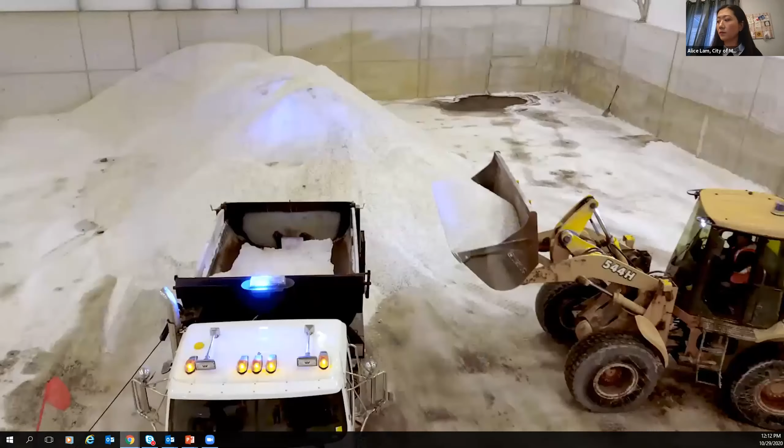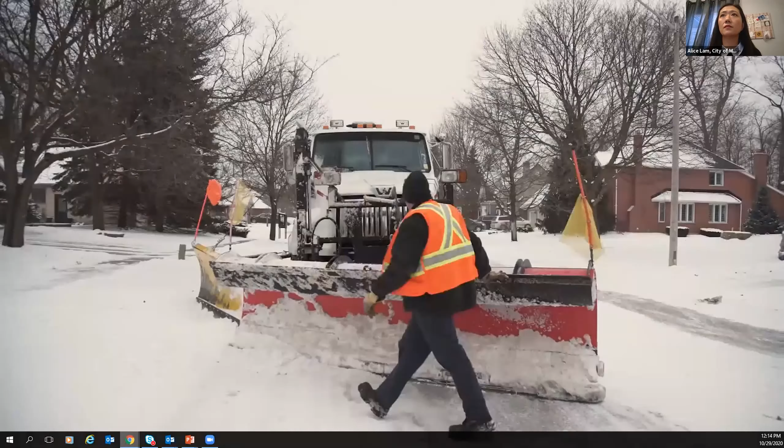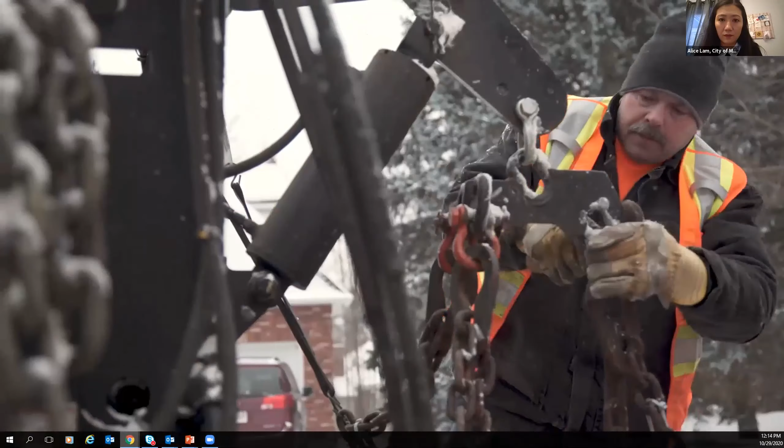I am a skilled laborer with a DZ license for the city. In the wintertime we do winter maintenance. One of the good things about this job is plowing the roads and keeping the community safe. If there's snow on the roads or snow coming, we get the trucks ready, put the plows on, do pre-trip inspections, load the trucks with salt. Usually a full plow starts at 1 o'clock in the morning. The city is divided into different zones. Our main concern is to do all the major arteries and bus routes first, which gives us time to do the subdivisions. You try to be sympathetic with people shoveling their driveway, and they see the plow truck coming and wave their fists or throw shovels. It's unfortunate, but you've got to put the snow somewhere. People do park on the side of the road, and it's inevitable that a plow truck trying to come down your street, or what if it's a fire truck, can't get past and has to back all the way down. If they weren't parked one across from the other, we could get by. If you have to start work at 7 in the morning and know the roads will be snow covered or bad, leave 15 minutes early and have good snow tires on your vehicle. Everybody wants to go home at the end of the day. We don't drive these vehicles that fast. You have snow coming off the wing, so stay back a little bit and try not to pass us, more for your own safety. Be patient with us so we can do our jobs safely. I love this job, it's rewarding and feels good to be part of a community. Our goal as snowplow operators is to make it safe for you and your family to get from point A to point B, just as I want my family to get from point A to point B. I know at the end of the day, at 11 o'clock at night, I'm shoveling like everyone else. We live in Canada. It's a great country.

Okay, so hopefully that gives you a perspective about our job in maintaining and providing winter maintenance through operations. If you want to find that YouTube video again, you can Google it - it's from the City of Kitchener and Waterloo, and I find it's a good segue for opening the forum.

So as the video said, in winter operation our mandate is to provide safe roads for everyone, and we want to make sure everyone gets home or to their destination safely. So how do we do that?

The first part of the puzzle is weather monitoring. Weather monitoring isn't just looking at what's happening today - it's kind of a science. We look at what happened in the past, what's going to happen today, and what's going to happen in the short term within a week and also two weeks out, because depending on the weather, it could trigger a different type of operation.

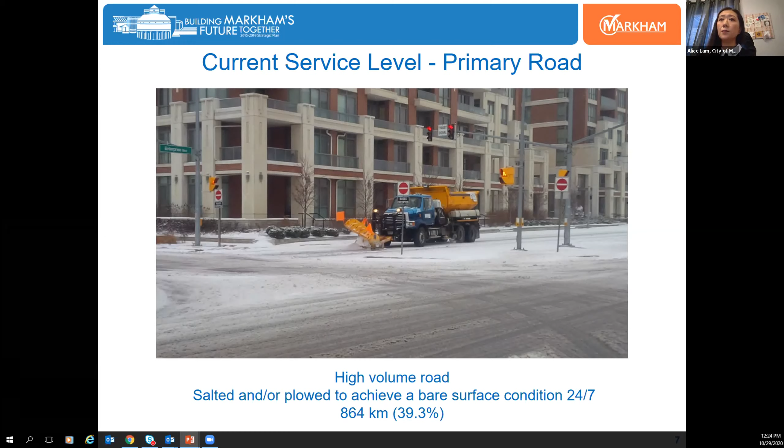So you can see this type of road is very important to us, 24 hours, 7 days a week surface. The reason is these provide the arterial for emergency services and connect to a lot of the regional roads or provincial highways. In City of Markham, primary roads make up approximately 39% of our network.

Secondary is our second class, which connects our local roads to our primary roads, and it's a small percentage, 7.5% of our entire road network. These roads are expected to achieve center bare surface between 7 to 6 p.m. Center bare means the crown of the road - let's say it's a 4-lane road, we try to clear as much of the center as possible. But first we clear the primary roads; once we clear the primary, we can get into the secondary.

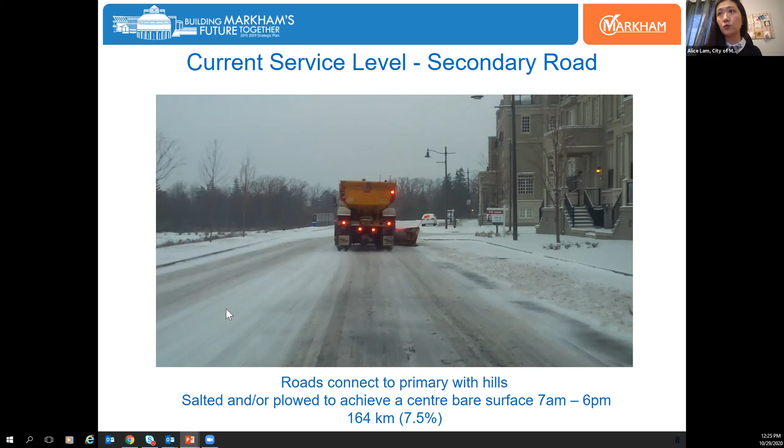Once secondary is clear and opened up, we can get into the local residential streets, which is the third category: local road and rear lane, forming a majority of our network at 53%. These roads carry very low traffic volume, and in City of Markham they are considered acceptable in snowpack condition. We will plow when the snow meets or exceeds 7.5 centimeters at the end of the snowstorm.

However, if the snowstorm hits 12 centimeters and is still continuing, we will dispatch. It can take us up to 16 hours to complete the entire network. Wide corner cleanup and dead ends will follow when the snowplow is complete.

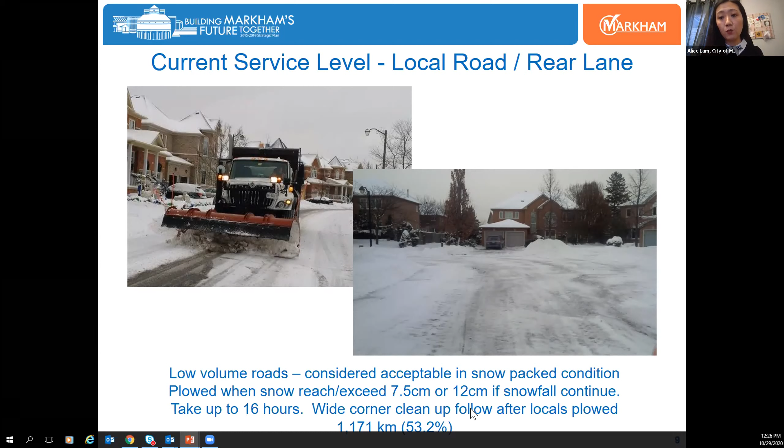Many of our residents ask, why don't you dispatch at the same time? But we need to plow the local road before our loader can go in to clean up the rest of the snow, because you need to assess if the boulevard or cul-de-sac has enough room to store all the snow for effective snow clearing maintenance. At the same time, we need to open up the network to allow residents to get in and out.

Sidewalk - I'll show some pictures of our challenges. We call it monolithic sidewalk, which is the sidewalk right next to the curb lane. Oftentimes, the snow from the road will get plowed onto the sidewalk.

And then when we plow the sidewalk, there's not enough room. Sometimes the snow goes back to the road. So back and forth, we call it chewing the snow. Oftentimes we may have to dispatch a particular type of equipment instead of a sidewalk tractor to help us clear it.

So a lot of our operators receive professional training and they're very experienced. During off time, they oftentimes will get familiar with the routes and understand where they're going. So there's a lot of challenge out there.

A lot of people think that it's very easy to plow the snow, like operating your snow plow for your driveway. But in this case, they're traveling with live traffic, and they don't know what's out there.

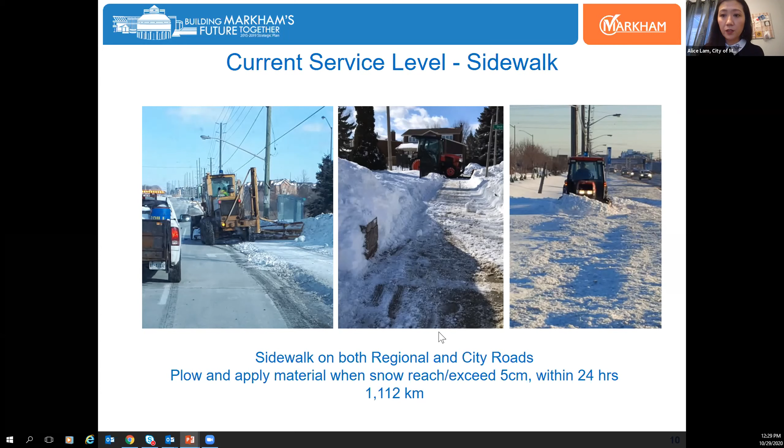In 2019, we retained IPSOS to help us conduct a residential survey, and we're very proud of the results. The overall satisfaction from our residents stated that 8 in 10 Markham residents agree that City of Markham provides snow activity clearance within a reasonable amount of time.

And three-quarters agree that the current level of winter maintenance is appropriate for the city's needs. Slightly more than half of residents agree that City of Markham is doing a good job communicating winter maintenance activity, which means this is an improvement area.

So we're not going to stop, and we see that there's an area we need to improve. This year we issued a winter maintenance newsletter to all of our residents, to update them on what to expect and educate them about City of Markham's service level. So it continues as an improvement project.

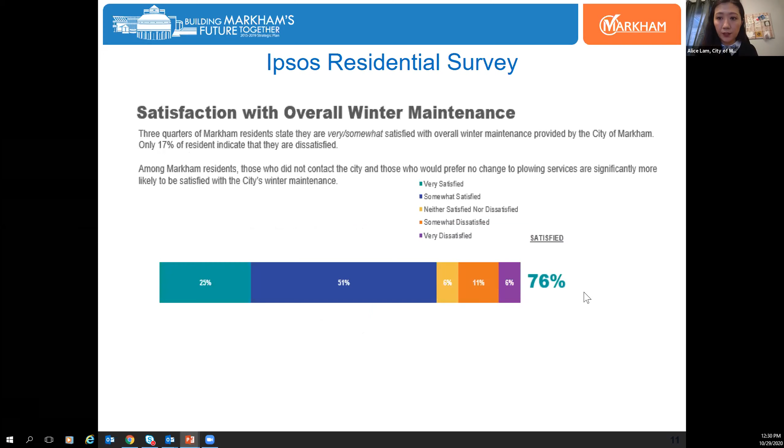The overall satisfaction from our Markham residents is 76% satisfied with Markham's winter operation.

So now let's get into another chapter. I talked about what winter maintenance is, what the legislation is, and what Markham is doing. Then, what are the impacts? What are some of the challenges that we face?

Climate change, for sure. I put down a graph about winter in 2018 and 2019. You guys probably remember in April 2018, we also had an April ice storm. So you never know what nature could bring upon us.

We experienced in the past an increased frequency of ice and mixed precipitation. What do we mean by mixed precipitation? It's not just snow.

Sometimes snow is relatively easier to push off the road, but ice is not as easy to push and scrape off the road. And sometimes ice also comes with freezing rain or finishes off with rain.

So overnight when the temperature drops, it will form ice. Then the next day, let's say a snowfall came, and the next morning the temperature is above zero. Then it's going to melt the snow on the boulevard. Then overnight it's going to freeze up. So all the snow that melts overnight is going to freeze up at night, and then the next day.

So sometimes our counterpart from another department may be wondering, Alice, why are you guys dispatching sidewalk operations when there's no snow coming down? But a lot of the time they do not know that there's ice formation on the sidewalk and we need to dispatch to prevent the ice.

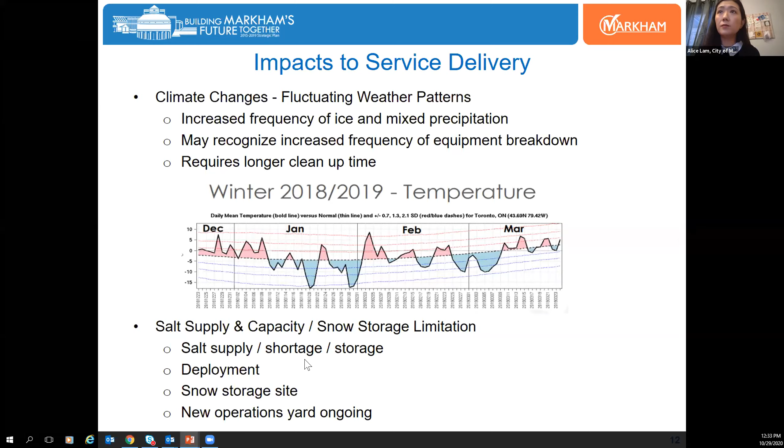What I want to touch on with parking on the road is that it creates extra work for us to go back out in the future, the next day, because it impacts the neighbor. The neighbor may say, oh, City of Markham, you're not doing such a wonderful job, you only cleared half the road, because our plow cannot put the blade down due to a parked vehicle. So oftentimes we may have to go back out, or it will impact the resident.

So this is a classic picture of construction constantly happening in October, November. You can see some snow on the side already, and with all this encroachment into the public right of way, how can a snowplow drive down safely? It doesn't take much for wind to blow all this structure, gravel, off to the road and right of way.

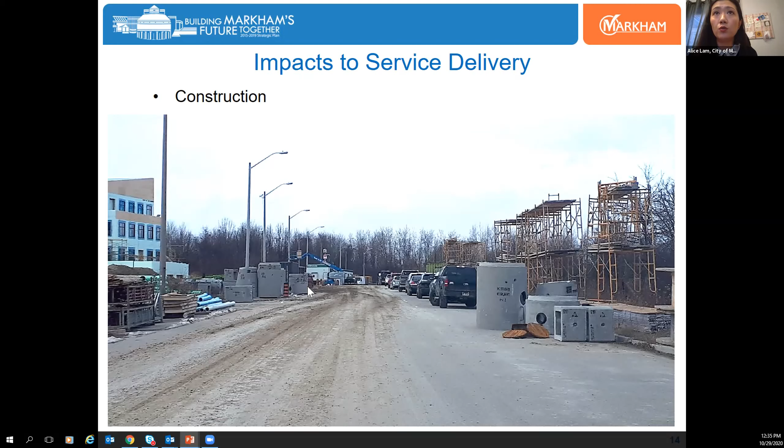Some road cuts happen during winter. This one is countersunk, but there's no signage. This one is actually just putting on a road plate.

This is a situation we experienced in the past, where our road patrol identified there's a road plate here, but we didn't get any notification. No one communicated to us that this was happening.

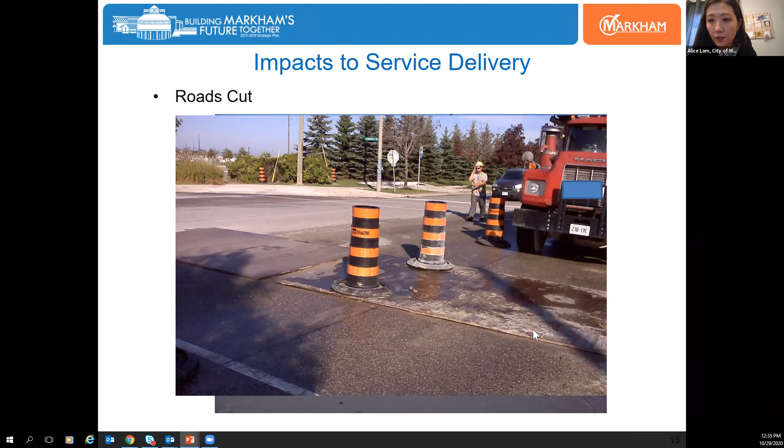And you can see there's no sign and the boulevard space. So why I want to show this picture is the relevancy of why we are not providing permit on road cut during wintertime. This impacts our winter vehicle.

The plow in the front, when they put it down, the blade hits onto the road, and when they plow along, it gets trapped into the road plate. It will cause our equipment damage, and it will also cause this plate to be shifted. Once the plate is shifted, it creates public safety concern for pedestrians and also exposure for what is opened under.

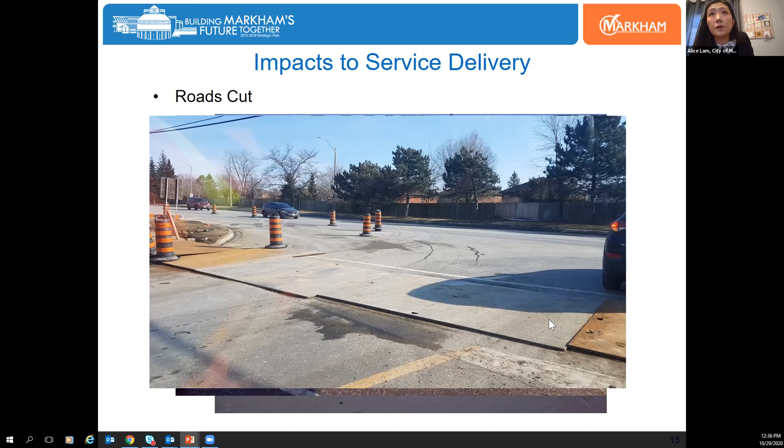You can see the boulevard and how much storage is on the side. We need proper communication and signage. All of this type of work needs to be planned ahead and thought through thoroughly, looking after all parties' needs.

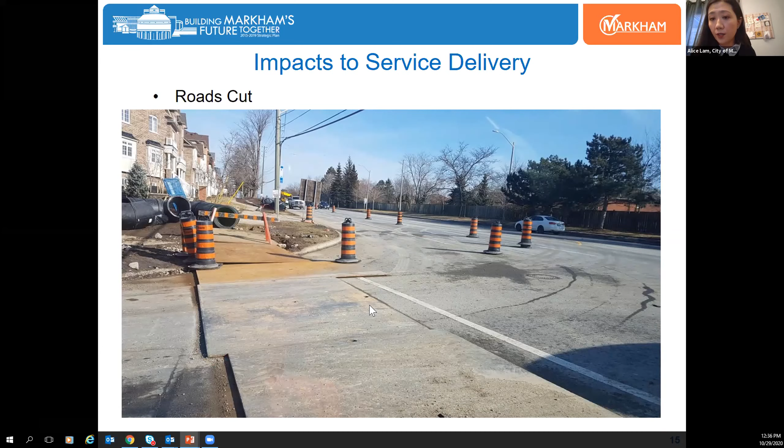So this one you can see some of the setback requirements are not enough. Our blade and our plow wing is going to tip over and it will potentially create damage to the utility pedestal.

And here is some of the sidewalk winter situation out there. They are doing temporary restoration, but the temporary restoration will contain hot mix, cold patch, and U-fill. You can see that a trip and fall is waiting to happen.

This one, they're trying to patch it up, but in winter construction, it's not just about the road plate and damage and challenge to our vehicle, but it's also about the settlement. If you're fixing it in the wintertime, oftentimes in spring it's going to settle and you have to come back, because of the freeze-thaw cycle.

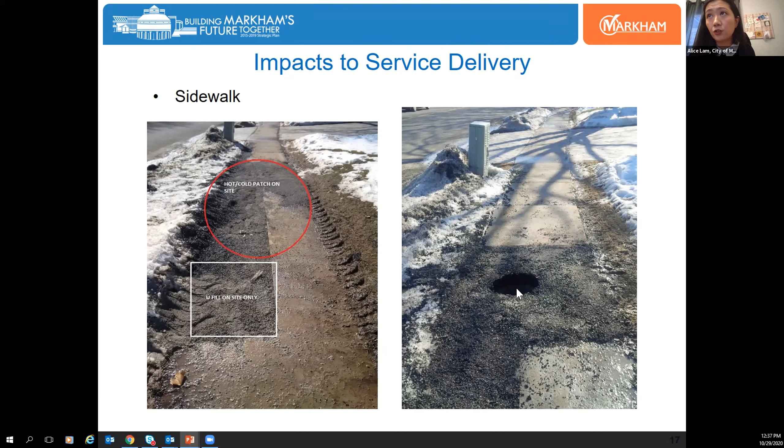So we need to take everything into account, and this is not something that any of us want to achieve or want to see happen, because it doesn't take much for children to potentially step into it, or any adult.

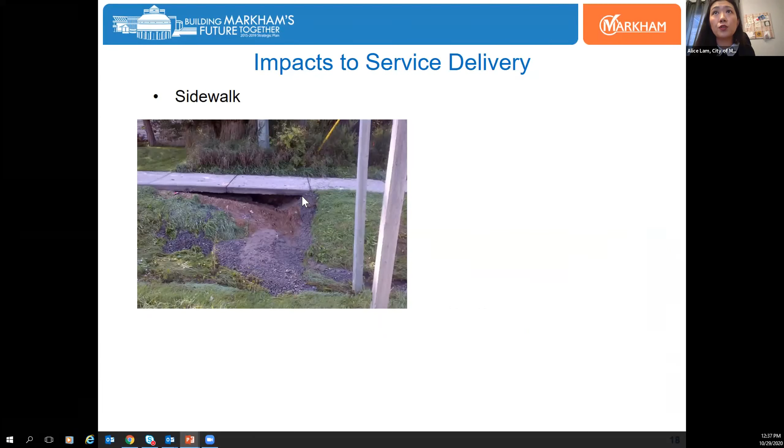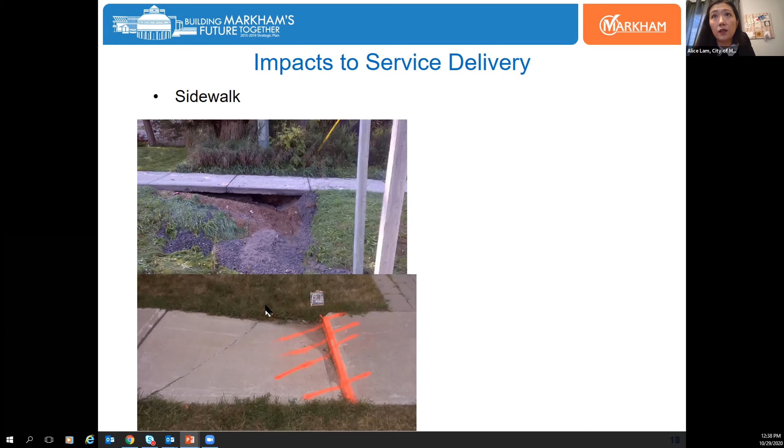So this is a failure after a directional bore. You can see it caved in, and the settlement. And another big displacement - in the municipal Minimum Maintenance Standard Act, it also outlines what is acceptable displacement, which is 2 centimeters. This one fell significantly, and it could create a safety hazard for our pedestrians.

And this changed in the wintertime, and you can see some of the protection is not covering the entire site.

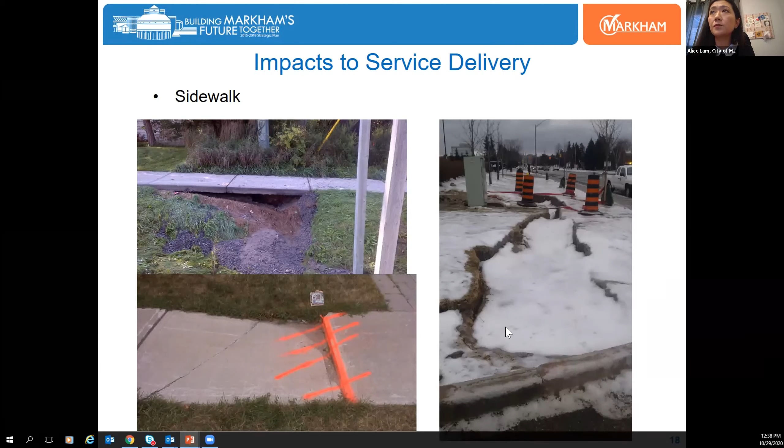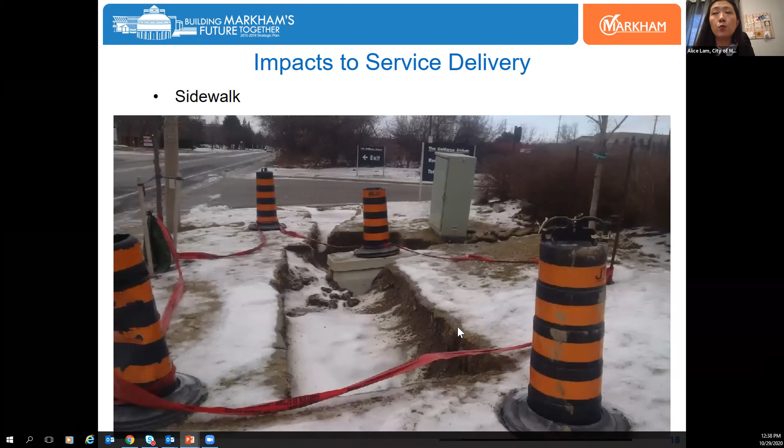All in all, I'm showing these pictures trying to put the focus back on public safety. That's all we're here for. We share the right of way, and we want to ensure everyone's interest is protected.

And now you're going to think, Alice, why are you showing me these pictures? These pictures don't have snow, and what is the problem? The problem is, here's the sidewalk, and when we plow the sidewalk, after 3 or 4 different operations, the snow is going to mount up.

And this site seems like a YRT bus station. When it's snow covered, no one can see this pedestal. If, let's say, YRT needs to send a loader in to move the snow off site, the loader cannot see this and could potentially damage the pedestal.

And this one is very creative. I want to draw your attention to the sidewalk. The sidewalk is actually here, but because of the pedestal requirement and placement, instead of proper planning and design to have it located in another area, they cut the sidewalk back. But when it's snow covered, our sidewalk machine will not be able to see it.

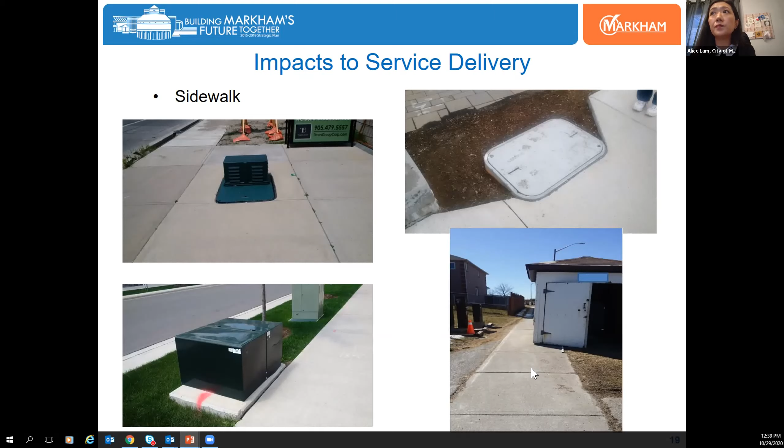And this one, there's no setback in here to provide some room for our sidewalk equipment to pass, and you can see there's some scrape marks in here already. And this one, we have the temporary structure in the middle of our sidewalk. So when it's snow covered, you will hardly be able to tell where the infrastructure is.

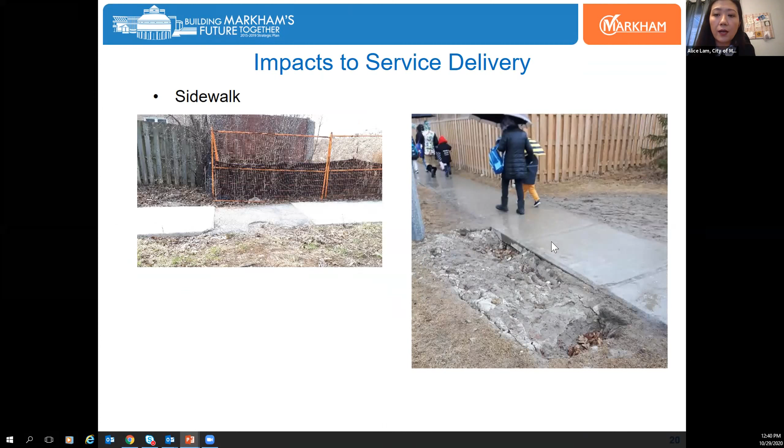Some of the hoarding fence and temporary structures again create challenges for our sidewalk operations. And this picture I want to show to put things in perspective - there's a lot of parents and a lot of children walking. So we want to make sure that the network is safe for everyone to enjoy and to use.

This is a restoration during wintertime, but a lot of the time, with snowfall or rain or freezing rain, all this mud and contaminant will wash down into our catch basin, which will create contamination and a spill report.

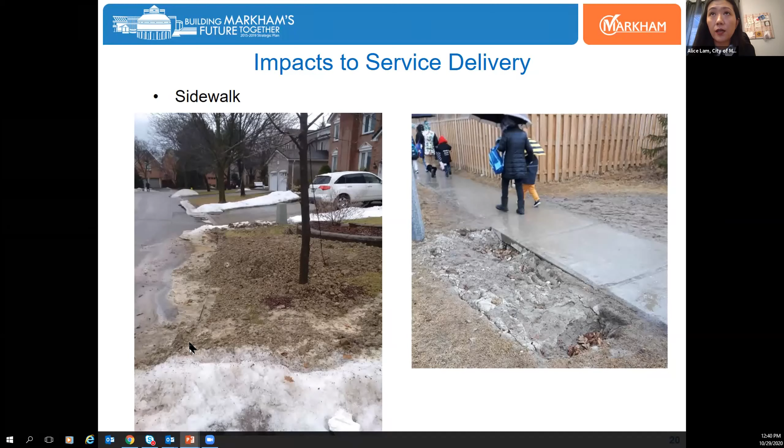Okay, so now I'm going to talk about the contact center call volume. In 2017 to 2019, the calls coming in to the City of Markham related to utility and streetlight concerns were 6,240 cases. These are related to streetlight cables, residents wanting new lights, requesting patrol, light malfunction. And for utility, the calls are usually related to TV, phone, gas line, hydro, utility safety, and other telecommunication cable.